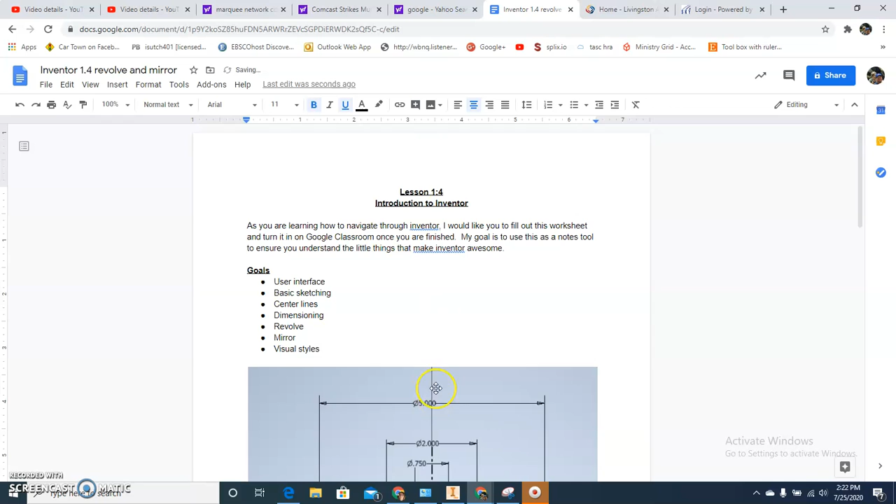It's summertime. Cubs are on, they're winning, it's a good day. No fans, but what do you expect for COVID era? 10 years from now, would you raise your hand and be like, wait, were there really fans?

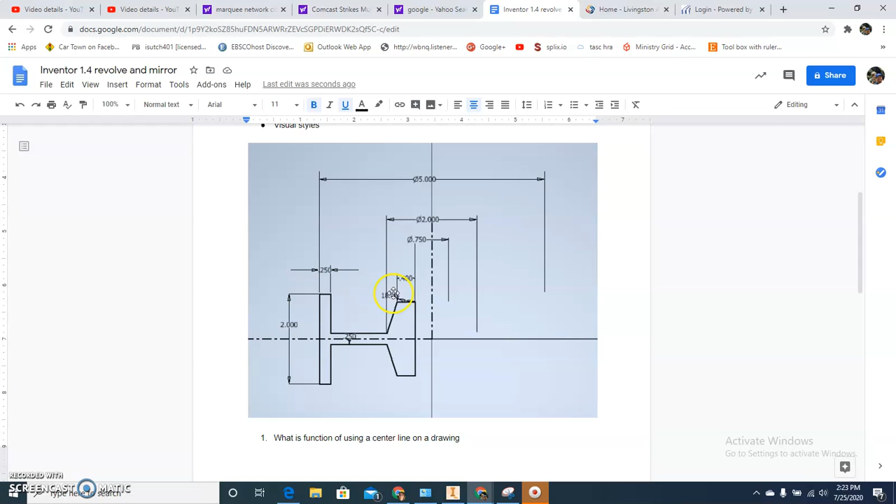Here's my first advice: don't just start making this. I need you to follow my steps on this. I know you got the measurements, I put them up here for you to reference. Don't start drawing, I need you to follow me. All right? So listen to the voice. He will not let you down. He is in me.

Are you ready? Take a deep breath, out, let's go. Okay, you know how to do this. File, new, same stuff as last time. Here we go, we're in. Start 2D sketch. Guess what? XY plane, please keep using that plane. Okay, here's how we're going to start this off.

We're going to start off by making a couple mirrors. No, not the glass ones that you look at every morning right before you come to school, the kind that will help reflect what you're making. So if you look at the top right-hand part of your screen, there's a thing called center line. I need you to click it, please.

Then click line. Now, here's all you're going to do. You're going to draw a vertical line here, and you're going to draw a line here. The size of those don't matter. Got it? Don't be all picky about size on Inventor, because a lot of times it's not going to matter.

Okay, so this is going to be your first drawing. That's going to be a lot of ish. Sometimes you don't want to put in all the measurements before you do your drawing. Sometimes you have to kind of work backwards in order to make things look right. Please trust me on this one. Okay? You think I'm nuts? I'm really not. Okay, so I'm going to reference my worksheet real quick, because I don't have that in front of me as a piece of paper.

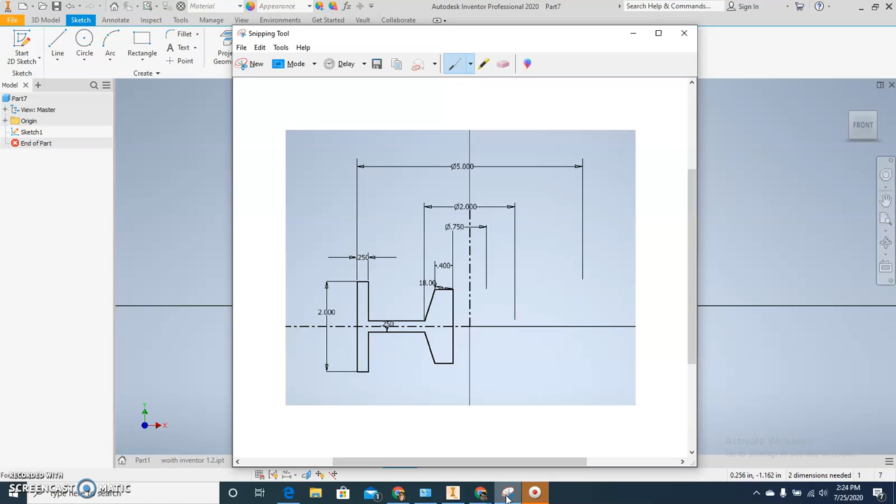Okay, all right, so here's how we're going to do this. Click line. Now, when you click line, the first thing I need you to do is unclick this. You don't want that on your lines. If you do, you can go back, highlight, and change it.

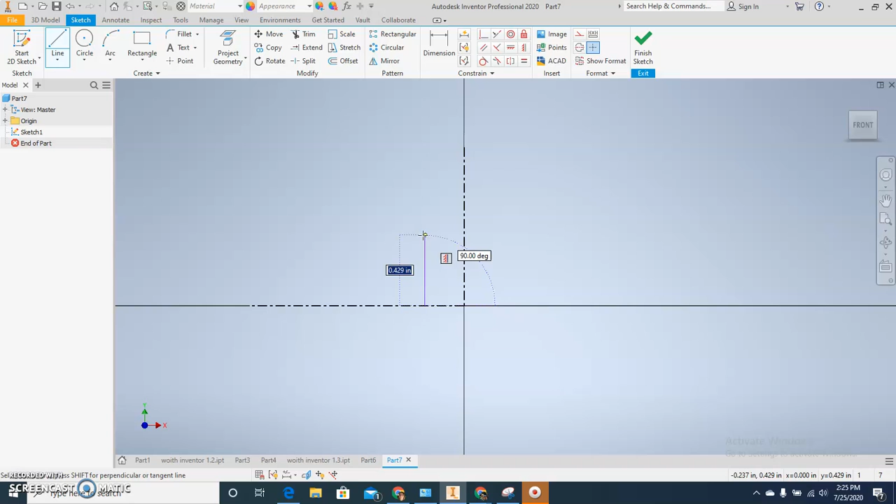But you don't want this clicked. So start drawing. This line right here, I would go up about 1-ish, 1.5-ish, somewhere 1 1/4, something like that. Okay, now you're going to type a measurement here. I know you're excited, I think it's 0.4. Yep, so this one you're going to type in.

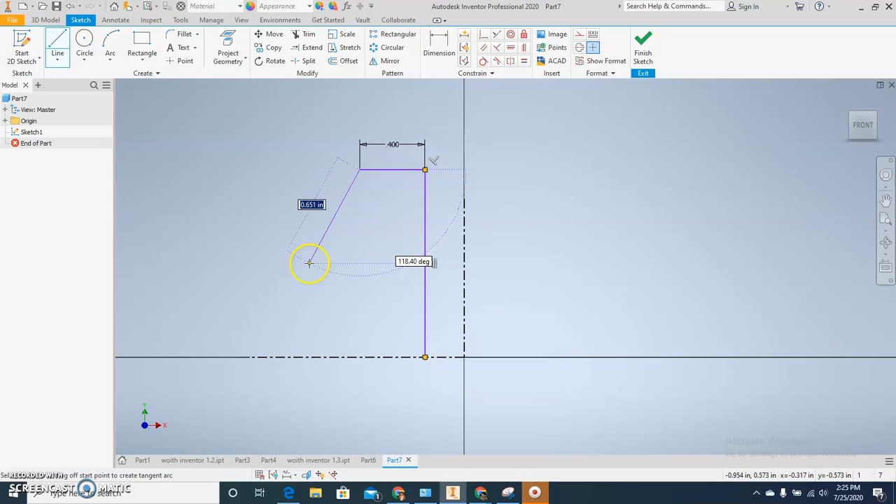0.4, enter. Okay, this next line, you're going to just eyeball it at an angle. Do me a favor, try not to have this little line up that you see with that dotted line. Don't do it. You're tempted because you like to line things up, which I'm proud of you for, but don't do it this time. Just make an angle.

Okay, then you're going to go this way. How long? Let's go about 1 inch or so. This object's not very big. Okay, now we're going to go up. This up, make sure it's at 90. You should see that little symbol pop up on your screen.

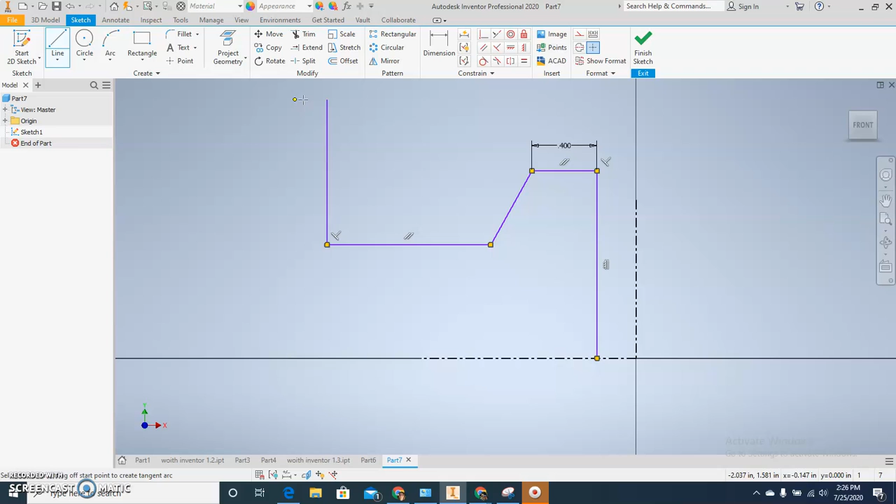Okay, so you're going straight up. Mine says 0.88, I like that measurement. And then go over 0.2. Press enter, press escape. You've got the first part of this done. Okay, but you're like, wait, I didn't connect this. It's okay, life is going to be just fine for you. Hopefully this is not the end of all end.

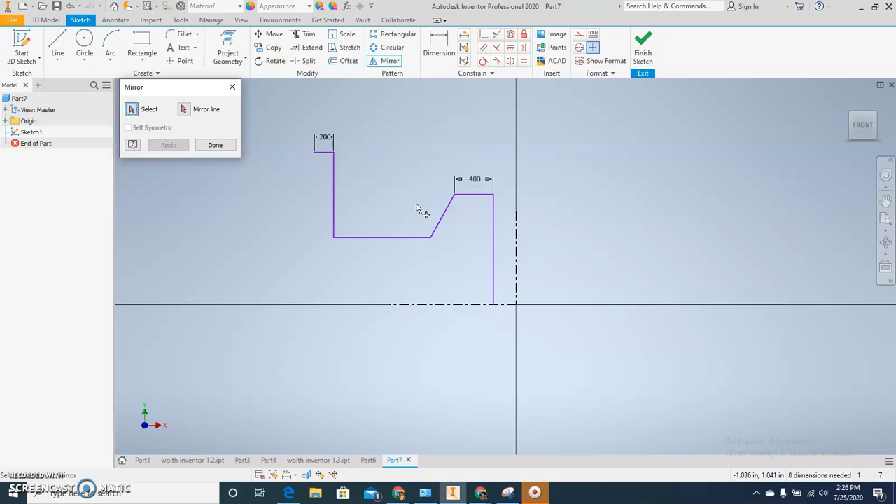Okay, we're going to mirror next. I'm going to do this step by step. Do exactly as I say. Click mirror. Okay, you should get this thing on your screen. You're going to left click down here and select your objects. So I'm left click holding, I selected everything over here. Okay, you're going to click mirror line.

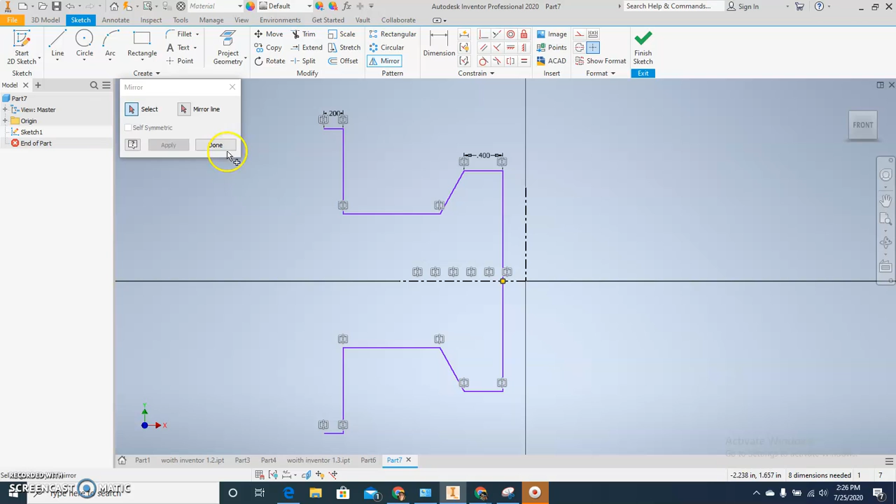Then this little center line will come into play, and you're going to choose apply. All these symbols mean that these are mirrored over from another part of the object. Press done. Now watch this—this is cool. If I move one, it references the other one.

I'm going to move this guy in because I know he should be a little bit shorter. Now I'm going to take a line and draw it down here. Why do I do that? Because I want this to be a complete line, not a segment line—you see that segment, that is a complete line. I'd rather do it like that just to make my life simple, which isn't always easy.

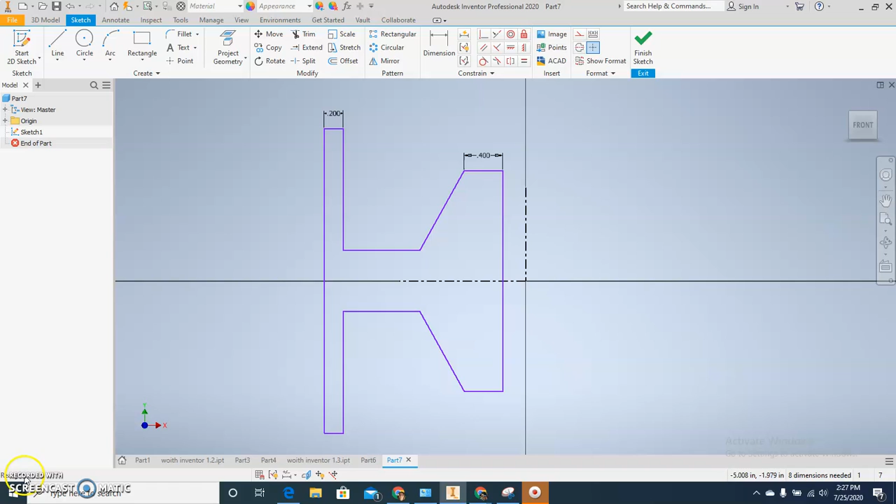Next we're going to do your first diameter dimension, but on a linear line. So if you click on dimension, click on this line, and this line, you get a kind of funky little measurement with a little diameter symbol. That's awesome, that's what you want. 0.75, press enter. As you notice, it bumps it out because it's locking it into this.

This just means there's a rotation here. It knows something is going to be revolved or something fun is going to happen here in just a few minutes, so that's good. So you got that down, that 0.75.

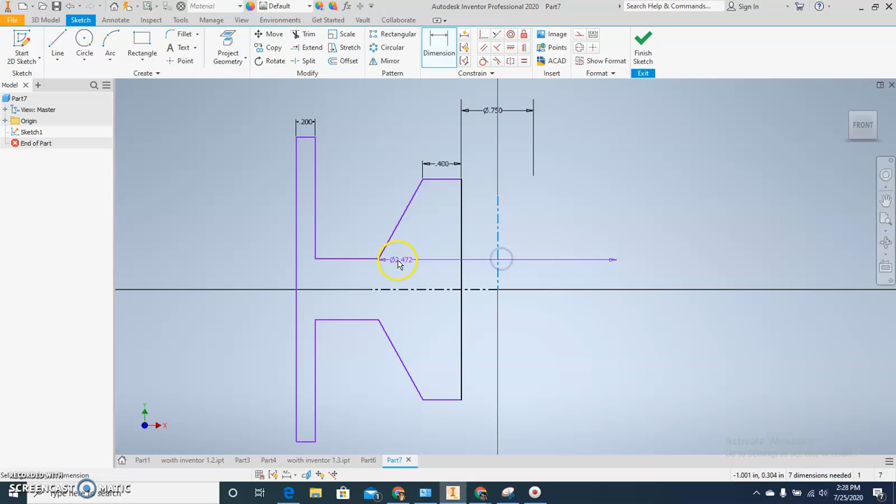Your next one is going to go from here to here, so this dot—make sure you get the dot, not the line. I always like to put the larger measurements on top so they're stacked. This should be 2, okay? You see it brought it back, that's what you wanted. Looking good so far.

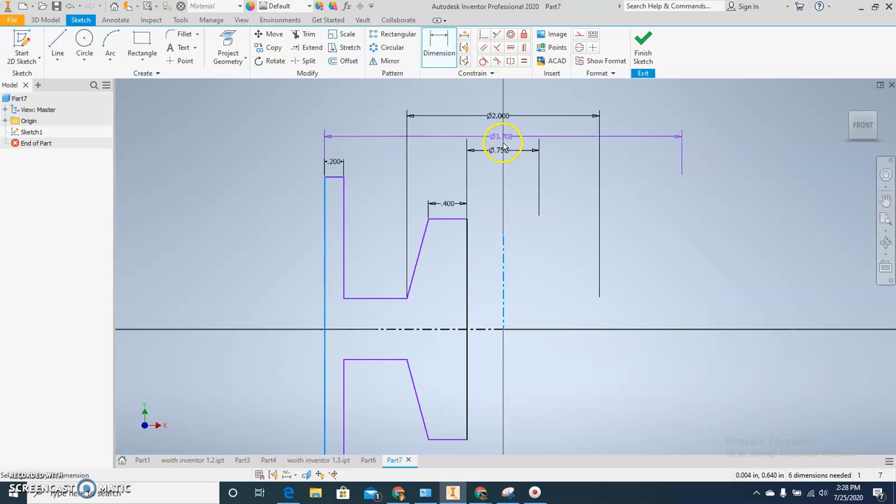Press escape a few times and bring that up so it's a bit more visual for you. Okay, one more of those, dimension: outside, middle, go up. This should say 5, it should drag it out. And it did. If you've done this so far and it's looking similar to this, you're doing great.

Next I need an angled one. I'm going to click this, click this, and move this inside of here. Let me do that again for you: click the angle, then click this line, and go down. Type 18. One more measurement, and then you're done with this part.

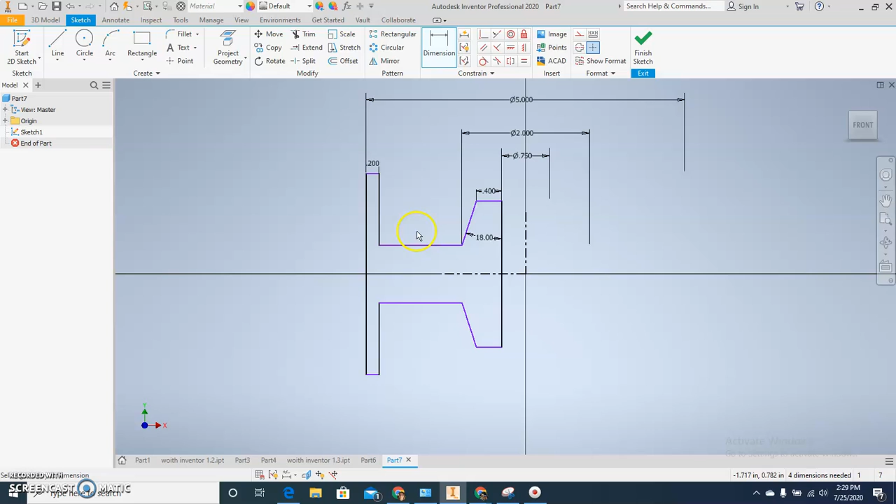Click these two middle parts, dump it, 0.25—that's exactly what it should look like. Now wait, there's one more thing left, sorry, I forgot, right here—how can I forget you? That should be 2. Okay, so when you're looking at this thing, you see it's all black. That's great, that means you have all your dimensions in there.

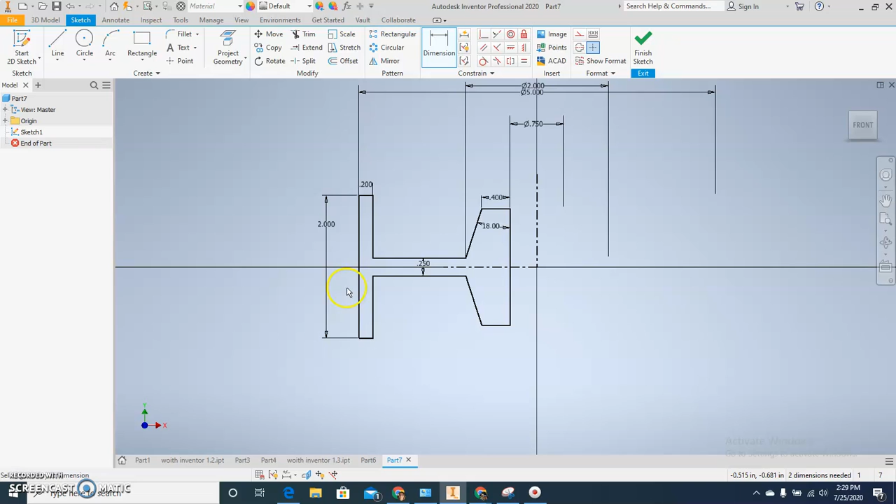It's looking great. So on the question on your sheet it says, what's the function of a center line? Sorry, I'm just moving this up because I like doing that—I press escape to move the objects if you're wondering how I'm doing that. When you make the center lines, it's looking for a mirror or a revolve.

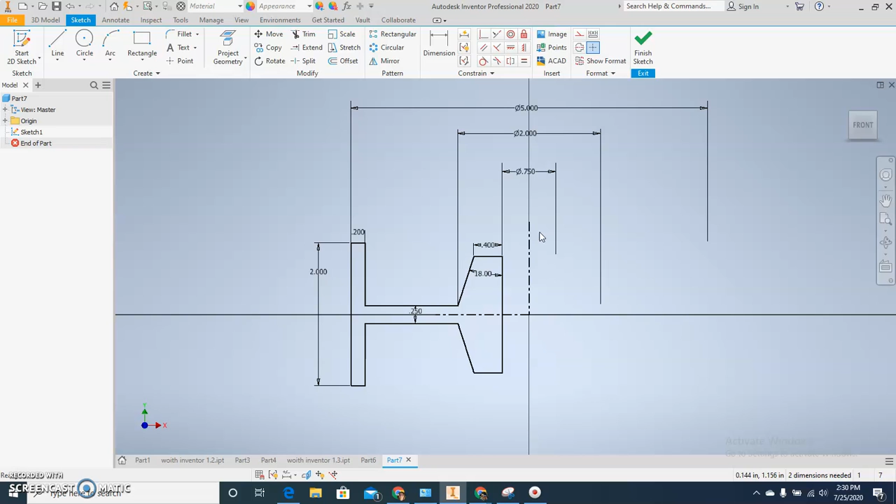So let's jump into the revolve. What does a revolve do? Well, it revolves an object—creates a feature or body by revolving one or more sketches on an axis. Exactly what it's going to do.

Click revolve. Okay, it automatically saw all of this stuff, which is great. If it did that, you did well. If not, you're missing something—you may want to go back.

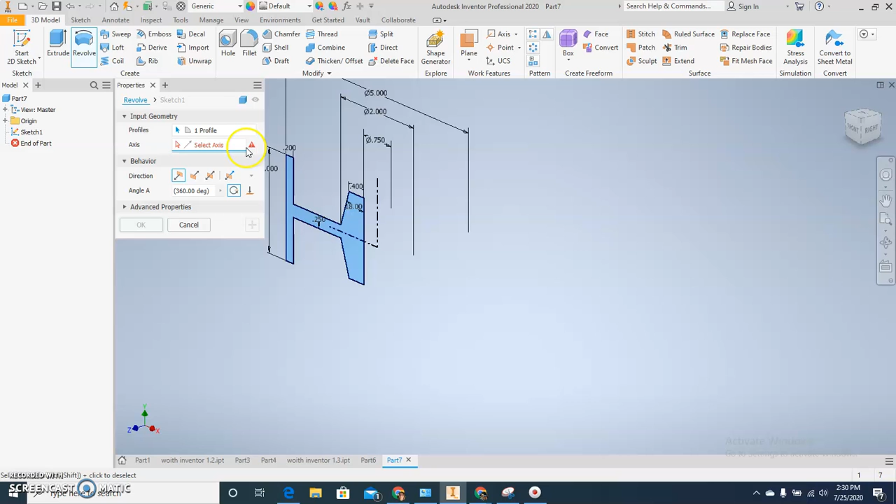The next thing is the axis. I'm going to click this little red arrow right there, I'm going to click this guy, and it makes a revolve. Your dimensions vanish, and you got this. Good job—this might be a two-videoer because I'm going slow.

Okay, so you should have this so far. You're looking pretty.

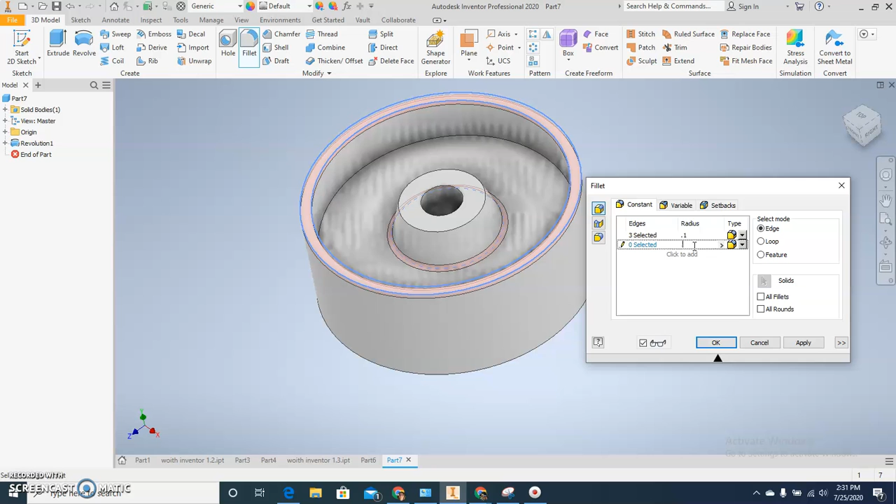Next, more fillets. We're going to do this a little faster since you have more experience at it. So set it to 0.1, I'm going to click that, dot, and dot. Now I'm going to click to add—I'm going to do a 0.6, and that's going to be this inside right here. Press OK. Alright, you got that?

So on your video you saw that I did the color—I'm going to do that again. I'm going to color this just to add a material to it, just so it pops out a little bit better, just so I can see it. I don't know, it doesn't really matter, I just want to be able to see it so it pops out a bit more. It's just for my own purpose.

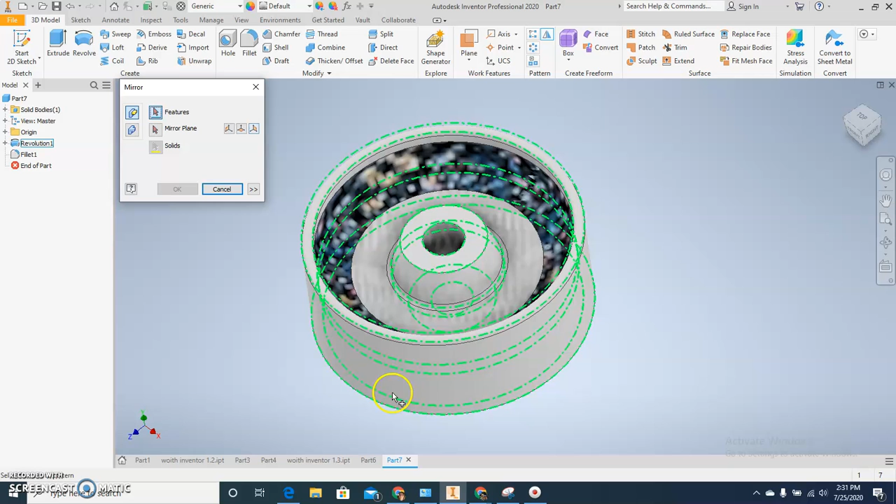Next is your first ever mirror. What does a mirror do? Mirror makes a reflection, okay? So here's what you have to do: I want to mirror my fillets. Why? Because I don't feel like flipping it over and doing this whole thing again. So I'm going to click fillet—now it gives you the options of the origin plane, X, Y, all sorts of different types of stuff.

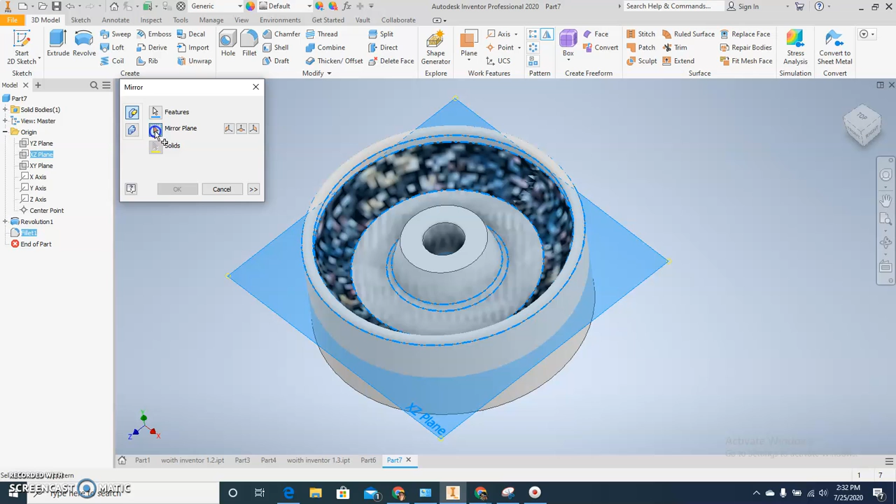I know mine is the XZ plane, but I want to show you one more thing. If you click the plus on the origin, I often like to use this because I can see it better. Click mirror plane, choose XZ plane, press OK. Now, if you look underneath it, there's your stuff.

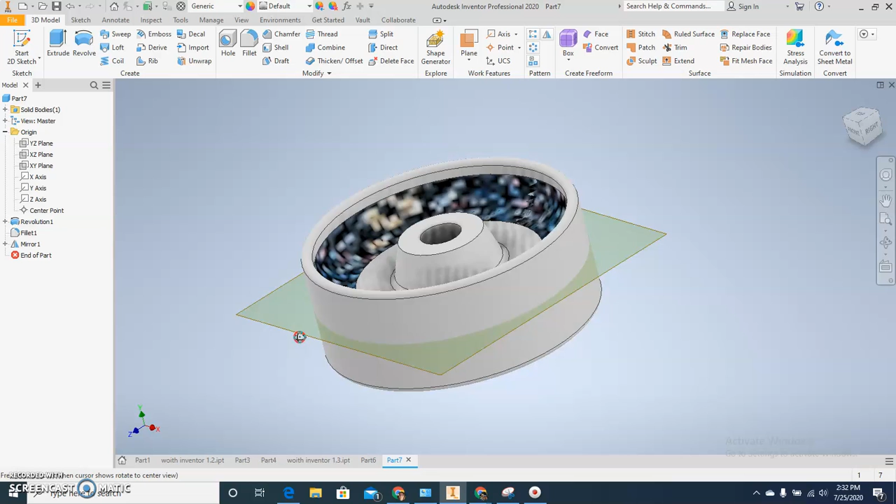That little color didn't mirror over. It's fine, no big deal. Leave this up for now because you're going to use it here in a little bit again. Now we're going to make some ribs.

Not baby back ribs, ribs on this part. Let me see if I got everything so far. Yep, looking good. So we're going to make some baby back ribs. I need to click on this top surface, not this, the middle part right here, this little donut thing. I know, I'm talking about ribs and donuts, you guys are getting hungry probably.

When's lunch? Okay, click new sketch. You should still see all of your lines. That's how you know it's good. Maybe this color was not the best to use, I can't see it as well, but it's fine.

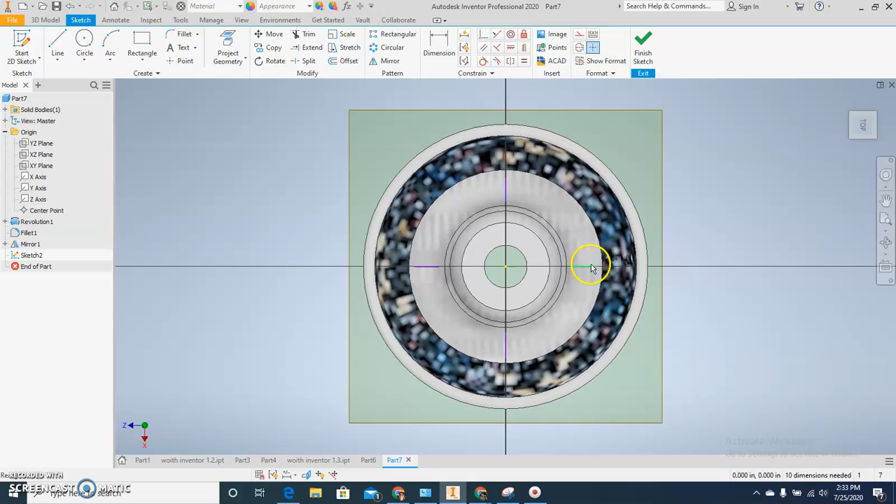Click line, and along these, just make a line. Now watch this, I don't care how big it is. If I press enter, it'll redo my last command, just like AutoCAD. It's really important these are on the line. Draw a line, hopefully I've slowed down a little bit from my previous videos. Just draw lines along the black lines right here. Got it? Okay, finish sketch.

All right, rib. Choose rib, please. Okay, you're just going to click these lines. It's that easy, it really is. I love using ribs, it's so cool. Let's make these 0.2 just for the heck of it.

As you see here, there are different ways to do ribs. This is a symmetric one, you can go forward or backwards. I just like to keep it in the middle, it makes life easy. Press OK. You got your ribs, all right, cool.

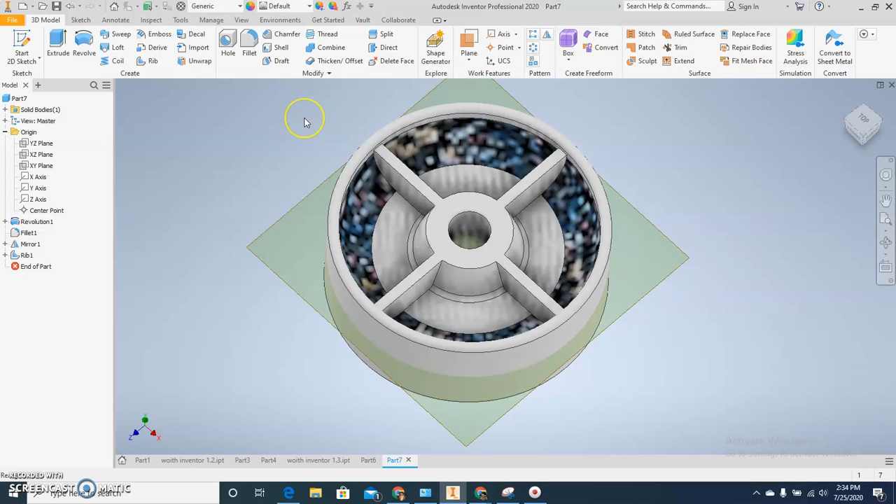Let's do some more filleting. Let's just change this all to 0.1, keep life easy. Start clicking inside of all these.

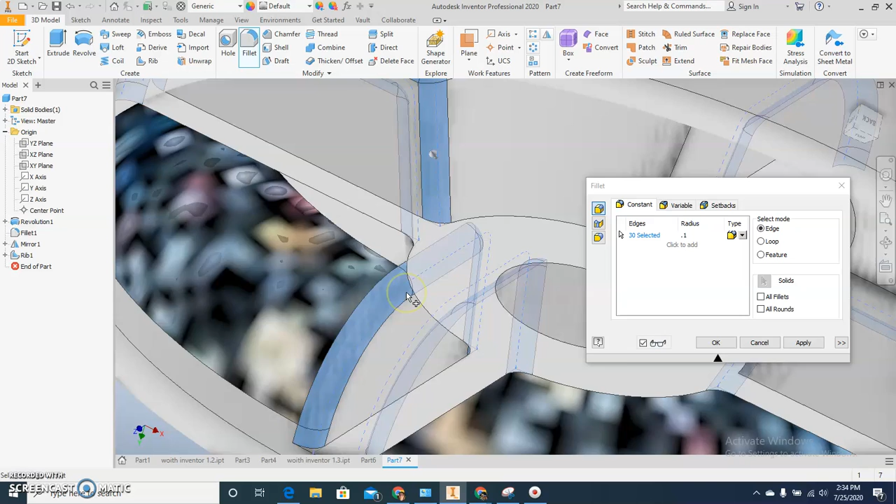I'm going to flip mine now so I can see the other sides. Because you're like, why am I filleting these? I've already filleted enough, wait, I know how to fillet, stop wasting my time, you promised me. Well, there's a reason why I'm doing this, and you'll see in a minute. It's all in the mirror.

Okay, so we got our ribs made. Final step on this drawing, actually there's two final steps. Mirror. Inventor does not like to mirror fillets attached to another object when you mirror it, it just doesn't work. So we have to do two mirrors.

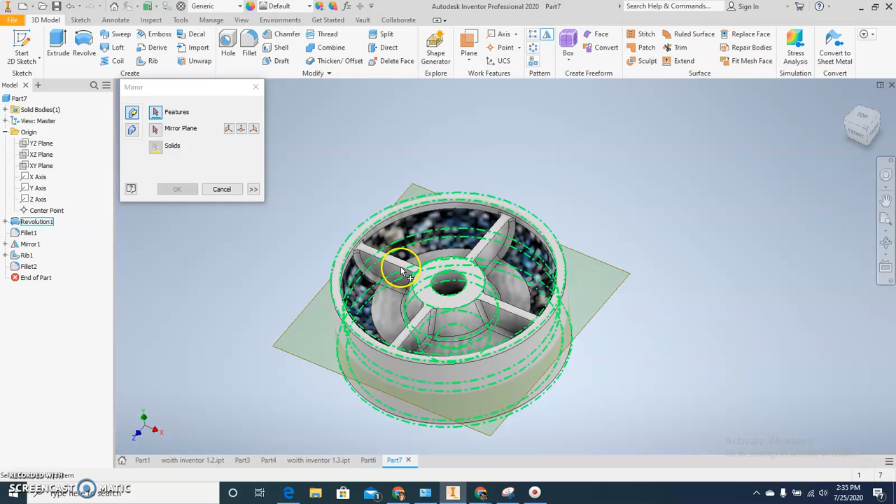So feature first, I like clicking over here because there's just a lot of object, it's hard to get through. Keep your life easy, just choose rib. Choose the mirror plane arrow, I'm just going to choose this right here because it's already there. Press OK. Now look at this, ribs. Do it again, mirror.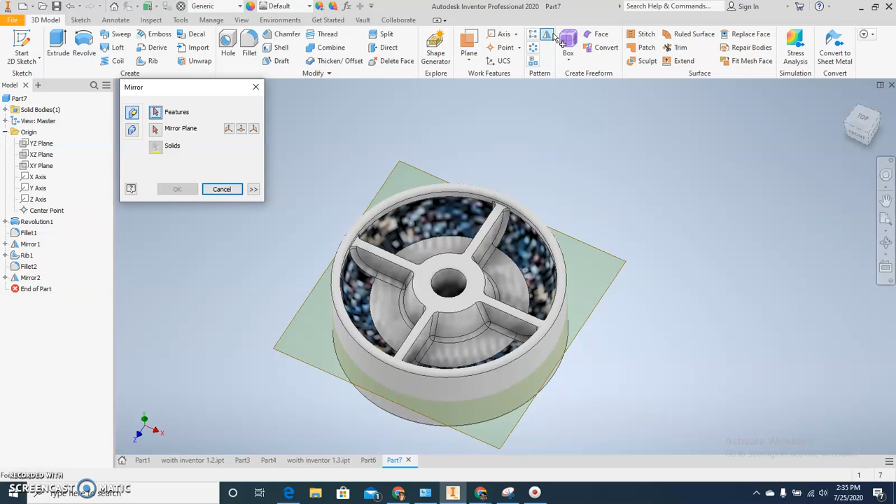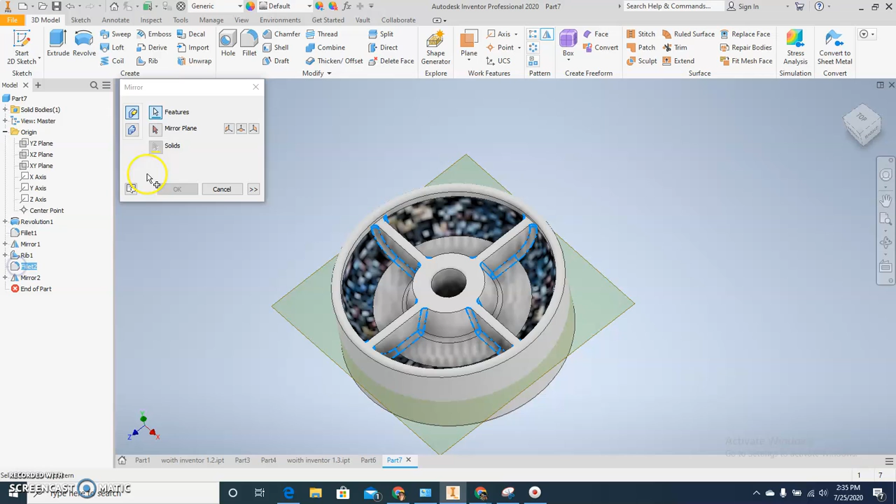Go over here, choose a fillet, choose a mirror plane, click this, press OK. Oops, got an error. Why'd I get an error? Try that one more time. Mirror, choose fillets, mirror plane, choose that, press OK. Hey, it worked that time. Don't know what I did wrong, but I did it. So in order to get rid of this, right-click and go to your visibility.

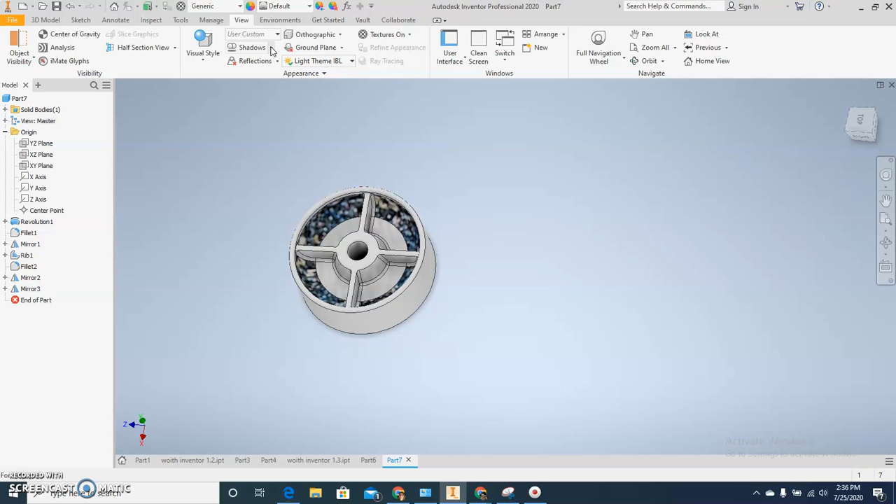All right, one more quick thing, I got a minute left in this video. I want to show you visual styles. If you go to View, you can make shadows, so you look around and you'll see some shadows on your object. You can go reflection, it'll give reflection down here at the bottom. See that? Cool, huh? Your visual styles, you can go shaded.

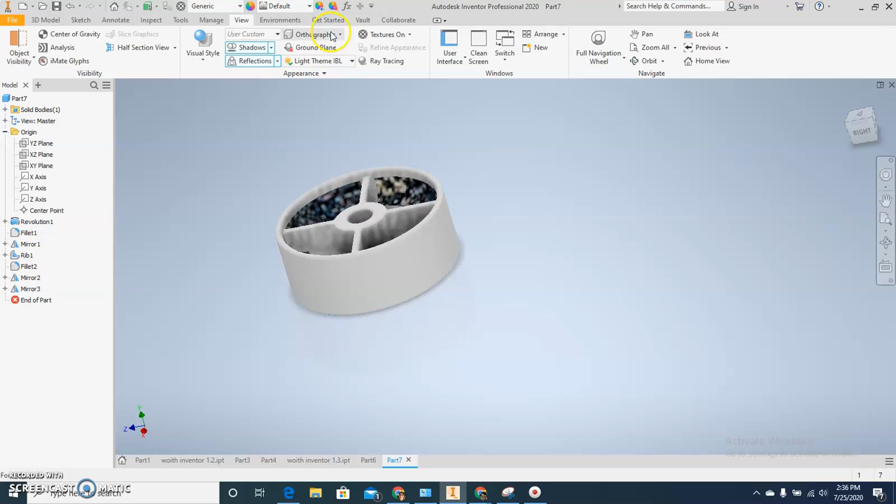You can do all sorts of different things. Avoid ray tracing, it will slow everything down. Ray tracing is right here, I would advise not doing that. Your ground plane, you can see where your ground is. So these are just different ways to be able to look at your object if you want to.

It's just for future usage. You may find this to be a cool thing later on, but as of right now, just don't worry about it. Hope you guys enjoyed the video.